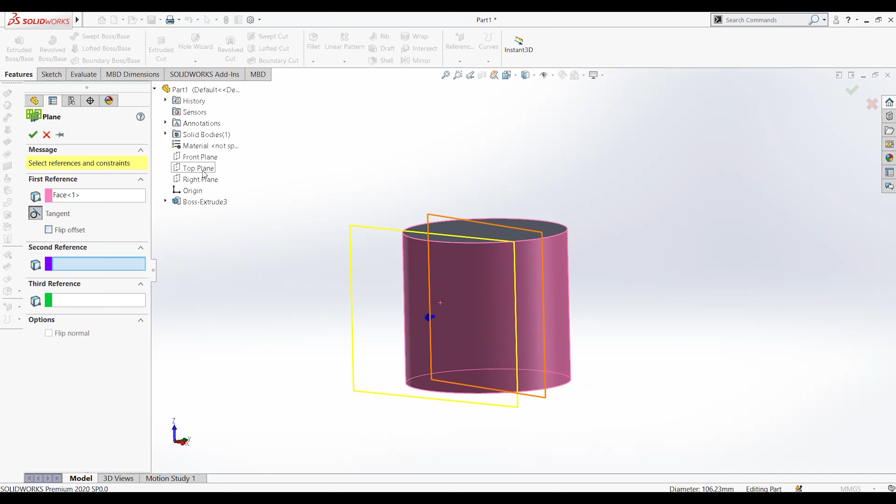And now I need to create a reference plane so that I can sketch the pattern which I want to project onto the surface. So I'll create a reference plane. The first reference is this, and the second reference will be a plane tangent to it, so that I can get a tangential plane to this.

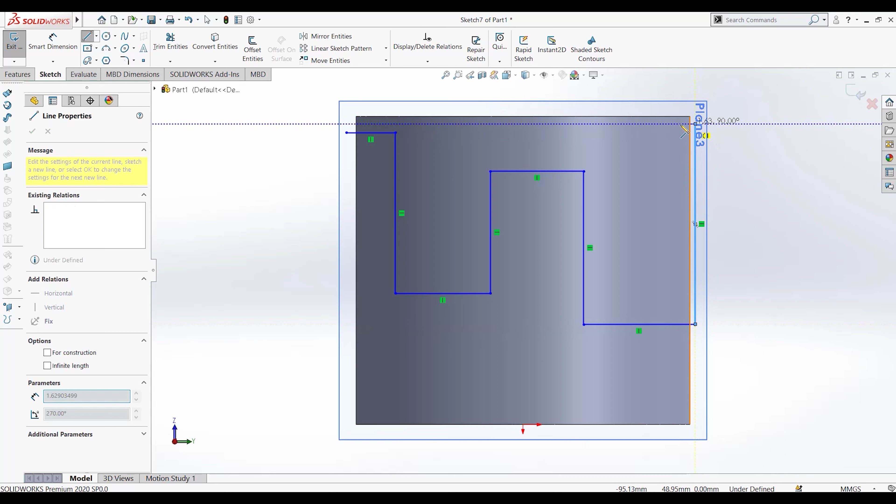Now I'll make sure I am oriented properly so that I can sketch. Now I'll just create whichever pattern I want. So make sure the pattern is always a closed sketch, or else it cannot be projected onto it.

Now let's activate the wrap option over here. Now I'll select the sketch and the surface to be projected on. So as you can see, it's projected onto it there. So there are three options here: emboss, deboss and scribe. So we'll start with emboss.

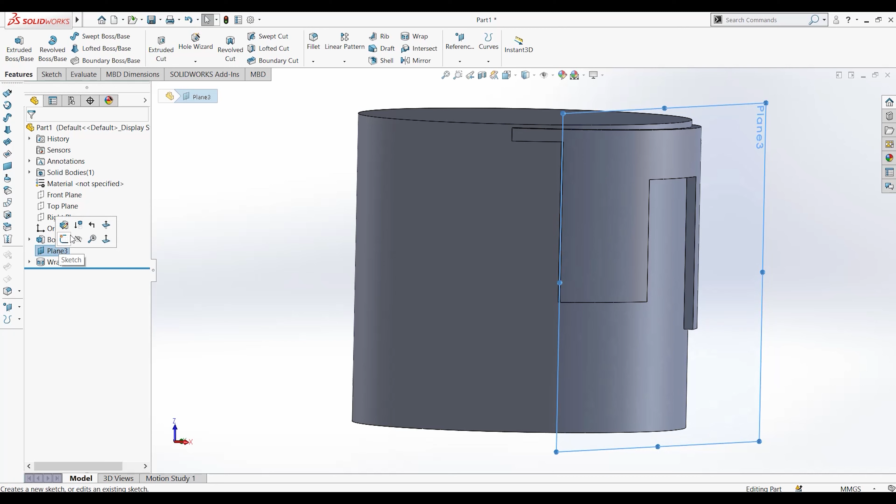So here when I choose emboss, it basically gets extruded on the surface by the selected thickness over here. As you can see, I've kept the thickness at 3.

Now if I press deboss, it gets cut into the surface of the solid by the specified thickness. And lastly, the scribe option just projects the sketch onto the surface. There is no thickness given to it.

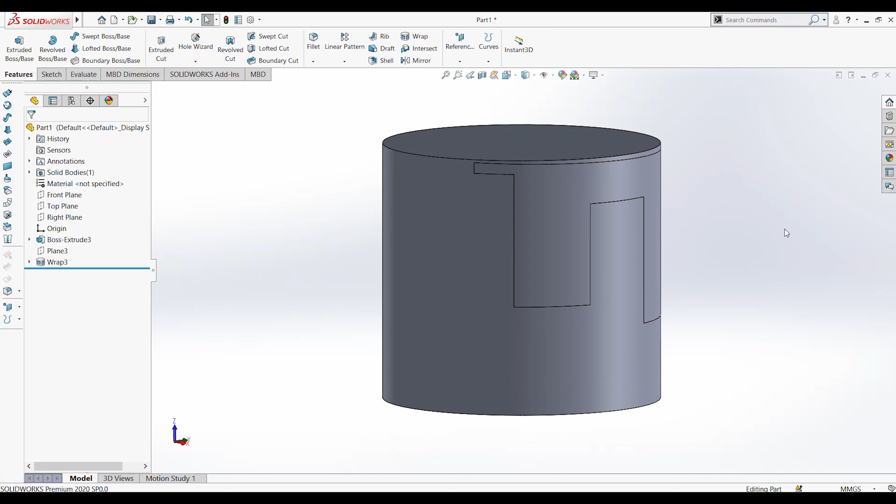So this wrap option comes handy when you want to create a pattern on a cylinder or something. Maybe it's used in a press where you want to keep repeating the patterns again and again. So based on the requirement, you can put the pattern and project it and wrap it up.

So as we can see here, there's another option here, spline surface. It's a slightly advanced option. We'll be seeing it in a later video. So this was the wrap option which we saw today.